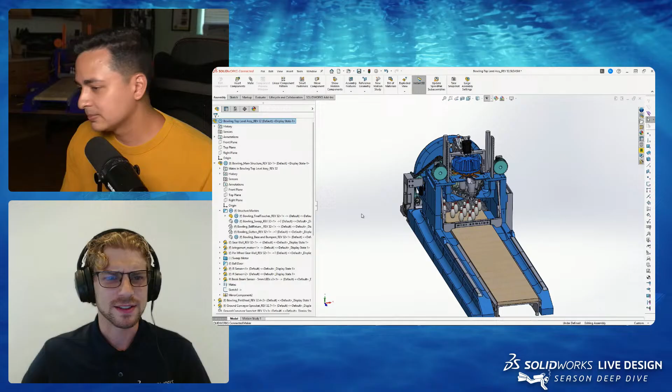How many parts do you have in this contraption? I couldn't even tell you. Hundreds, too many to count. There's a conveyor here, and then these chains that are print in place that have a bunch of different components patterned in a line. That eats up a lot of the amount of bodies.

So you can see the level of detail at this top level. But I just want to show you that if you imagine a layer, like a stack of cake, there's multiple layers to the model. The first time I tried to model this, my feature tree was over 1,000 features, and it just got way too slow and bogged down.

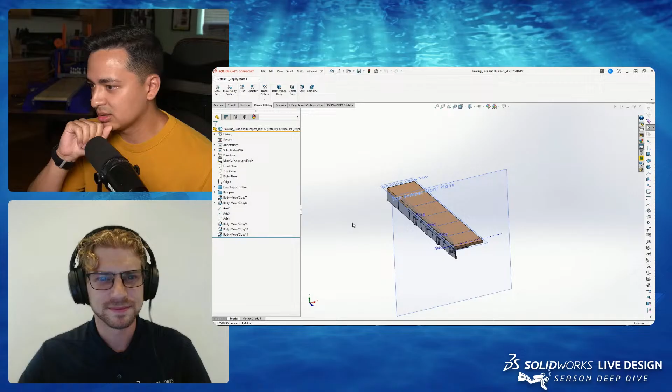One of the things I did to remedy that was try to separate all of the design into different chunks or systems. So this is the base layer where I build the lane, which is just a wood plank that I got from Home Depot, and then plastic. All the gray pieces are the custom parts that will be 3D printed. This is what I call the lane base, which is where I attach the wood to the lane so I can attach other plastic pieces to the entire system, and then it builds on top of that.

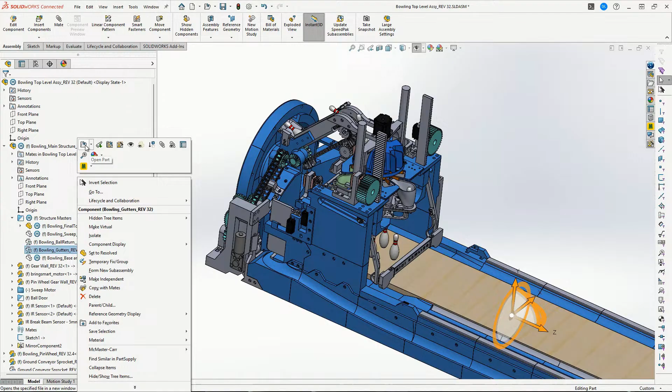The base layer is only a few hundred features, which makes it really, really fast, so I can still model efficiently. Every time I want to go to a next system or add another layer of detail, I'll take that part file and use the insert part command. It loads in the same geometry with all of my reference material that I want to use, but doesn't load in all the feature data that will bog it down. So I can just build on top of it and keep adding detail and maintain speed at different levels, but not slow down my overall model.

So you're referencing geometry from other parts of your model without taking in all the information that is attached to that geometry so you can maintain performance. Is that it? Exactly. Yeah, and you could keep doing this as much as you want.

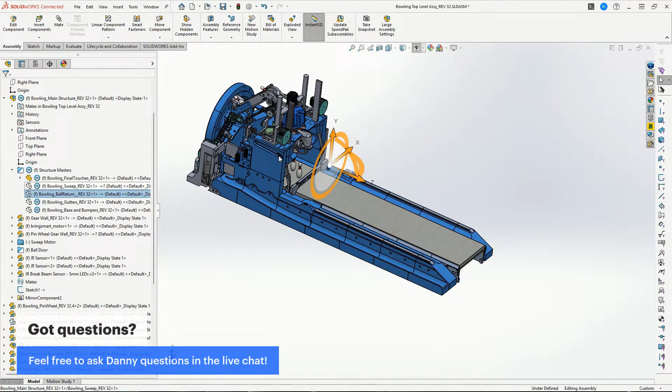To keep it organized, I have this folder of all the times that I did that. So the base and the bumpers is one level. Next layer of cake, I added the gutters, then the ball return, then the sweep, and then I call this final touches, like things that are just too detailed to add at lower levels.

Wow, that's so many more moving parts than I initially thought there would be. It looks like you have chains, gears. Can you take us through those moving mechanisms?

Yeah, sure. So maybe I'll just start by giving a general overview. Sure, yeah.

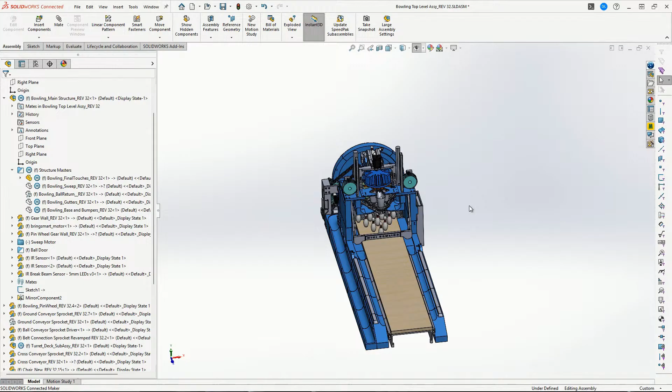Of how the pinsetter works, and how I came up with the scaling for the project. I thought it should fit on a table, kind of like beer pong, but not beer pong—like mini bowling. A kitchen table is like 5 feet long, so I found a wood plank at Home Depot, about 4 feet long, an inch thick, 10 inches wide. That left another foot or so for the pin setter behind it, and I scaled everything based on that.

For the ball, I wanted something that still had the weight you need for a bowling ball to gather momentum, so I found a 2 inch marble. It's got a similar weight factor, and all of that is really important to how the pins fly—they call it pin action. When you bowl, there needs to be a ratio of height between the pin and the ball, and the weight between the two is really important. That's kind of how I came up with the general scale for the project.

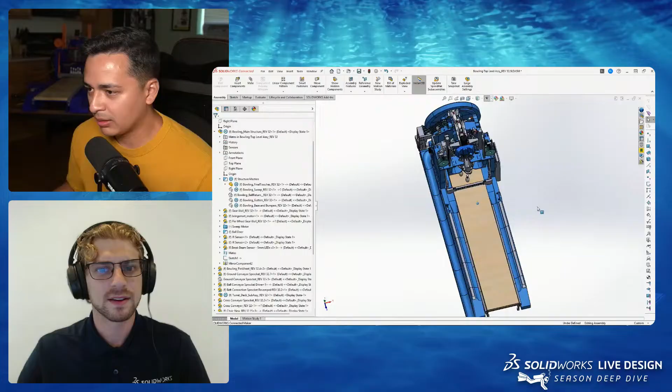Do you have some weight in the pins as well? Yeah, so oftentimes I always start with, what's the worst idea possible? I always think it's a really good idea, and then either I'll realize myself, or I'll post a video about it and be like, yeah, this was really stupid, I got to revise this.

So at first I'll show you the pin model. At first I was like, okay, this is a pretty small printed part, maybe 2 or 3 inches tall. How do I add weight to this? So I was like, oh, tungsten—tungsten is great because it's one of the heaviest elements.

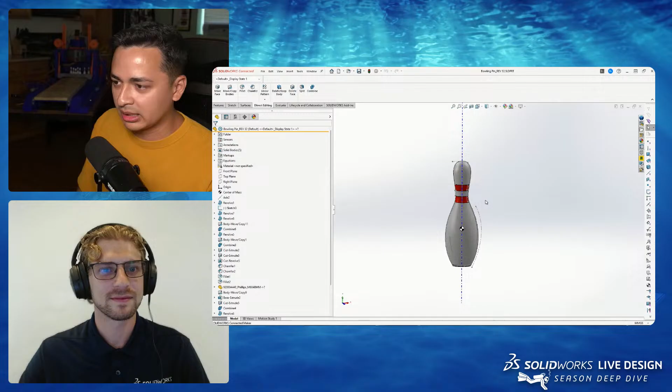So they sell these tungsten gram weights that they use for small model projects. I took one of those, and if you imagine this printing from the bottom to the top, I paused the print and added a tungsten weight in it, and then the print would finish, and I'd have a pin that's the right size and the right weight.

SolidWorks is really cool because if you get really good about adding materials, it'll also tell you the center of gravity and the center of mass, which is super important for bowling pins to behave properly. I got really technical about it—if the weight is a third from the bottom, this is where the CG is. Okay, it's too bottom heavy, now I have to adjust that.

But obviously, if you don't know, tungsten is also really expensive—like 20 of those tiny little weights was probably like 20 or 30 dollars. So I was like, okay, that's a terrible idea. Those are some expensive pins. Yeah, exactly, and I was making mistakes too—I was like, oh crap, now I need more tungsten, I keep running out.

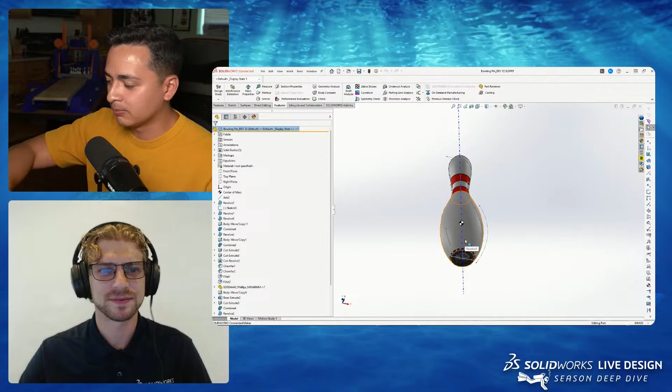And also, as I was making progression in the project, people expressed interest in building their own pin setters. So I was like, okay, now I need to think of a way to do this more systematically, where anyone in the world could recreate this who maybe doesn't have access to small tungsten chunks.

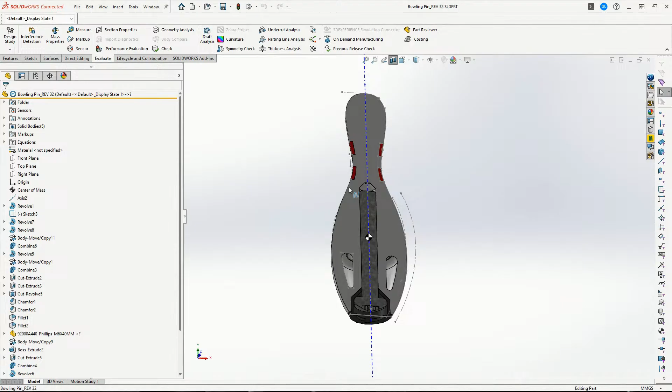So my better solution was, the entire project uses the same M3, M4, and M6 bolt. I basically hogged out the middle and allowed for a cavity for an M6 bolt to be inserted through the bottom to add that weight. I did the same thing where you can adjust the mass properties to get the CG you want—you can see I hogged out some material here to have the pin behave how I want it to. But now I have a cheap way of making pins that anyone can go to the store and get an M6 bolt for.

This is cool too—you could print in multiple different materials. The most common material is PLA, but this bottom portion is TPU, which is a rubber material. So I have this rubber cavity in the bottom to add some gripping for the pin so it doesn't slide, which is also really important. But now it's something that can be easily sourced and made by anyone, and more affordable.

I love that you kept every designer in mind when making this, in case they wanted to replicate it.

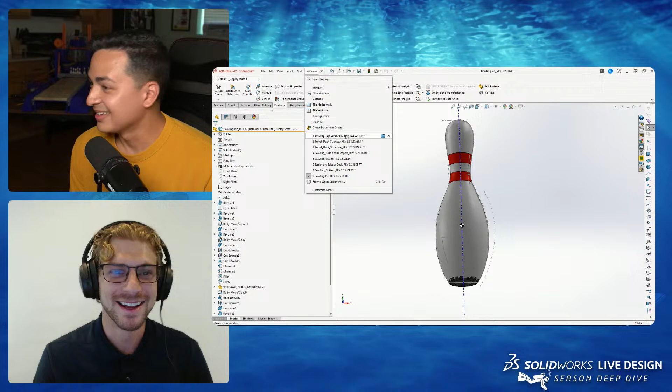I love these episodes because when I saw this bowling alley, I'm looking at all the different moving contraptions. I want to know how that works, all the thinking that went into that. We're just looking at one of the pins, and you can already see the layers of thinking that went into just the smallest detail that you probably wouldn't think at first is super complicated, but it actually is. There's a ton of detail in this, and it's funny you don't realize how much detail there is until you actually dive deep.

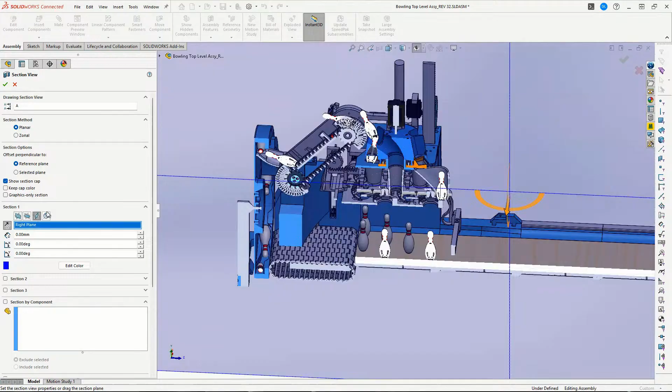Okay, so I didn't even explain how everything works. So you bowl the ball, everyone knows how that works, the pins will fly out. So these are where the pins live, and the area behind it, I believe, is called the pit. So the pins ride back behind here, and I'll take a section view, which basically just means you're cutting it in half. If you cut the whole model in half, this is your view at the side.

So this is a conveyor, and I have a motor attached to the conveyor. So this here, can I take a screenshot and draw?

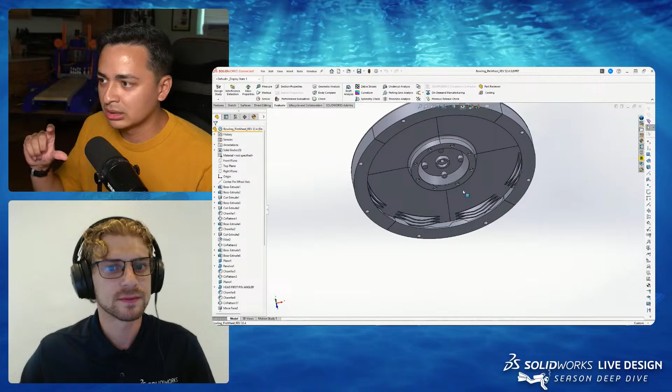Okay, so as you knock pins over, they fall down here, and this conveyor is driving to the left. Then what you have here is the pinwheel, this big wheel in the back. The cool thing about this is that regardless of the orientation that the pin is falling - so like I have a pin right here - you could have a pin that's head forward or bottom forward. Regardless of which orientation it's in, the pinwheel can catch it with these grooves.

So I think I have a better view of it. You can see how these pins can get trapped in those grooves facing a little different directions. One of them is head forward, the other one is bottom up. So as the pins are knocked down, the conveyor pushes them towards the pinwheel. The pinwheel catches them and rotates them upwards to give them height, for them to be cycled to the rest of the pinsetter.

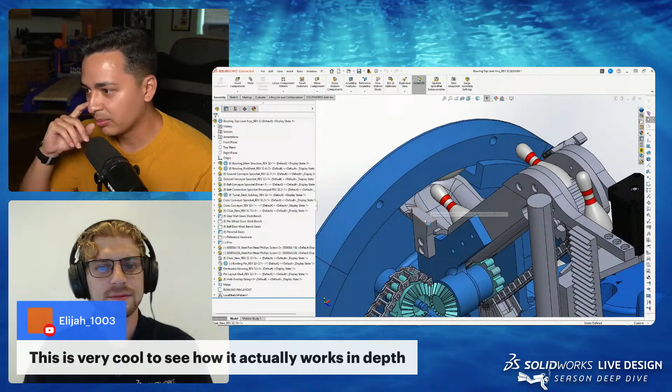And then this is one of the really cool parts, where basically, like I said, pins can load into the pinwheel head first or butt first. But regardless, this is called the turnaround pan, so regardless of the orientation of the pin, it's always going to land butt down. Let me see if I have a good video. Is that because of the weight at the bottom of the pin? Yeah, so the pin itself is bottom heavy, which helps it kind of fall.

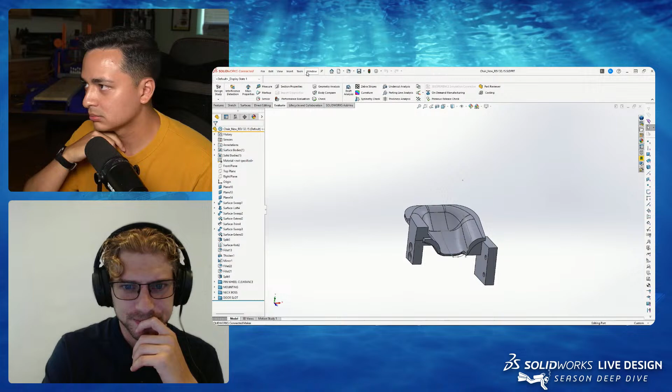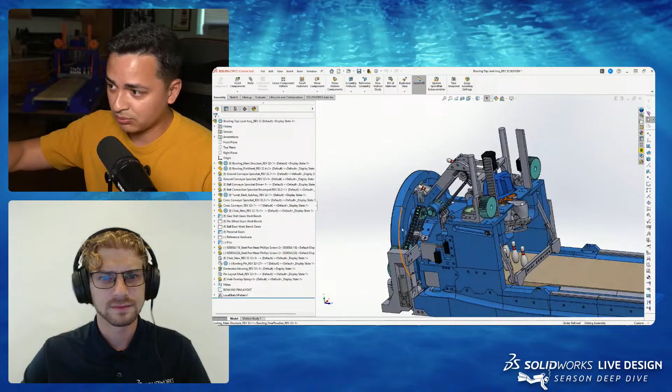And then there's another conveyor, which I call the cross conveyor, which is actually pretty tough to build because it's at a 45-degree angle. How do you catch something that's bottom heavy and give it a decent amount of height? But literally everything in a bowling pin setter is intentional - the pins are bottom heavy, which helps them ride up this conveyor. So we got to the point where you knock pins over, they go through this bottom conveyor, they ride up the pinwheel, now they're traveling this way across and up the conveyor, and then they drop into this thing called the turret. So basically, the turret is catching the pins and rotating them to their correct orientations.

Sorry, I should have loaded up a video about this before, but that's all right.

Just curious, going through this, how accurate is this contraption to a traditional bowling alley? Did you redesign all of this in your own way, the way you thought it would work best, or did you reference older designs?

Some things I took basically 1-to-1, or not 1-to-1 because it's about 20% scale of the model, but basically the same design recreated at scale. And some things I looked at and thought, this doesn't really make sense, let me create it in my own way so it'll be easier to build for other people.

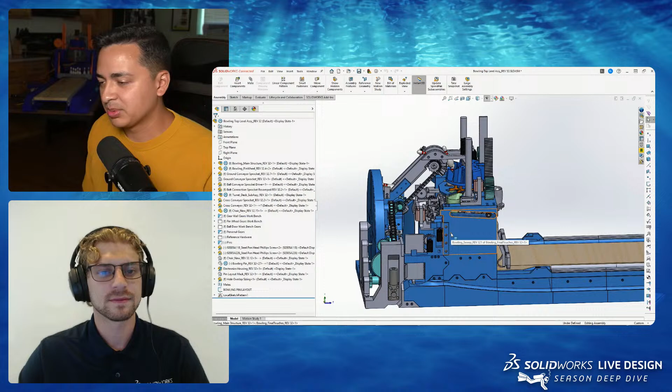So for instance, one of the reasons why a pin setter could be included in a mechanical museum is because most pin setters use only one motor to power all of these different contraptions going on. Most pin setters have a ton of gear ratios and different mechanisms so that one motor can take care of all the action I'm describing.

I decided I'm going to make this easier by using more motors and separating some of the motion, just to make it easier for myself. And it was still a really complicated project.

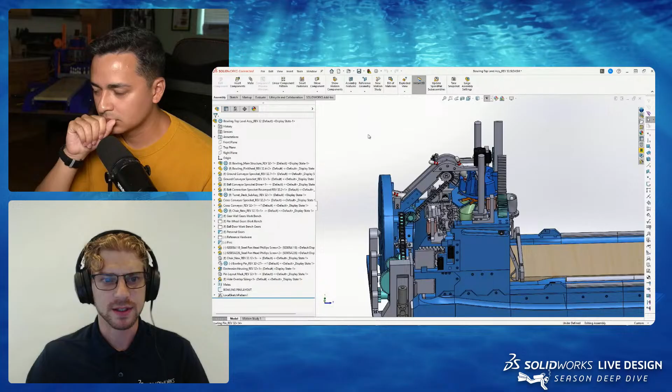So you use multiple motors for the different moving parts of this assembly? Yeah, correct. How many would you say you use in total? I think like 7.

There's one for this one here that you see controls it. I did some gear ratios to try and limit how much extra electronics would be needed. So this one motor controls that conveyor at the bottom that is pushing the pins to the left.

And then this gear train, which I'll go over in a bit, also controls the pinwheel, which is what's going on in the back here. And through this linkage chain, it's also the cross conveyor.

So out of one motor, you get 3 things going on. You get this bottom conveyor pushing to the left, you get this pinwheel turning and pulling pins to the top, and then you get pins going across this bridge to this circular, crazy looking thing called the turret.

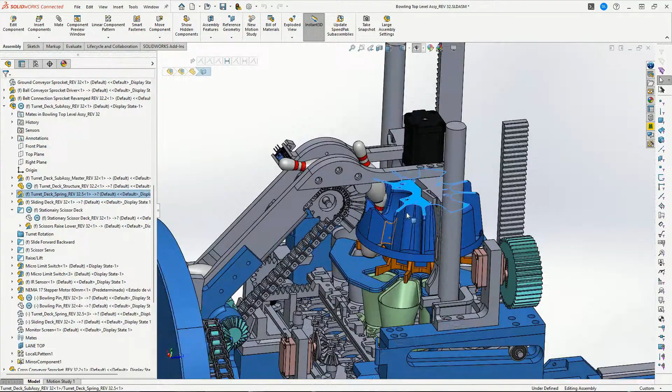So while you did use multiple motors compared to a more traditional design, you still made those motors efficiently contribute to multiple moving mechanisms. Yeah, as much as I could.

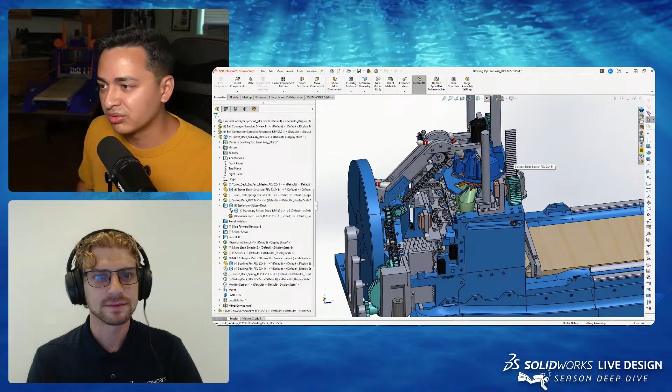Here it made sense for me to try and limit the amount of motors because I could, but it was also kind of a space constraint thing. Obviously a real pin setter is much larger — I can't do what I did here with complex gear ratios to control everything just because of the size, it wouldn't fit. But where I could, I tried to limit the amount of motors that I used.

This is so satisfying to watch, those pins being loaded into the turret. It's filled with a bunch of really satisfying contraptions.

So then you have the problem of: okay, the turret has 10 pins in a circle, but obviously the pins are oriented in a triangle. How do you transition them from a circle to a triangle?

So the way that it works is—this is one of the things I'm most proud of, I think this is so cool—the turret I made in 3 pieces.

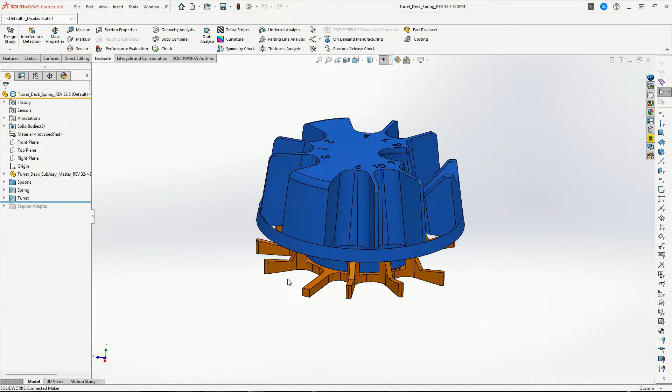So this bottom part is what I'm calling the spoons. The spoons are attached to the blue piece via a plastic torsion spring that I printed. Here, I'll just hide this.

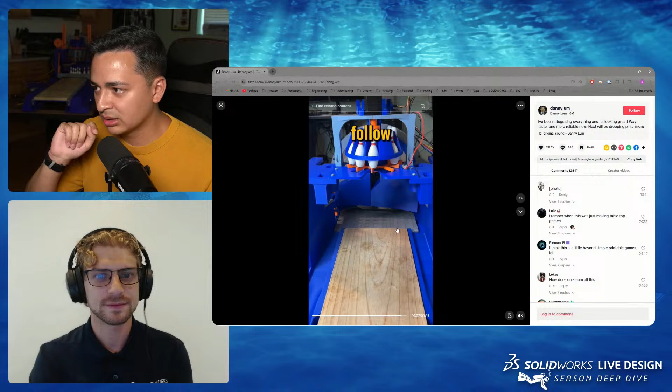So basically, you can imagine that the spoons can slide out of the way as these pins are being caught. Once I have 10, let's see if I show it in this video—the pins can slide out of the way. Did you see that? Yeah, I see.

So they're released all at the same time, and then after they're released, they go into what's called the deck, which is like these cone pieces, which I did a really cool thing in SolidWorks for. I'll show you. That's the part that makes them stand up in that triangle orientation, right?

Exactly, yeah. Basically these cone shapes - they're almost like funnels, like funnels that bring it from a circle to a triangle. So I made these, and they're all lofts.

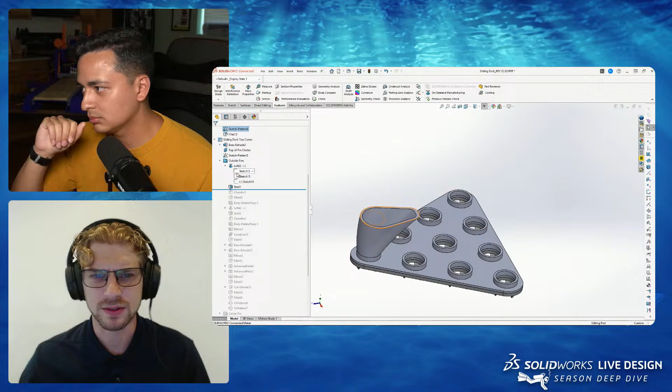I was going to ask, did you use surfacing for this or stick to more traditional lofting and extruding? This is just like traditional lofting. I try it - I've done some surfacing like this.

I call it the chair. This is surfacing because it's got like a weird bathtub shape. If I can model it using solid modeling, I'll do that, just because surfacing is so finicky - if you tweak one thing, it might break. You don't have a ton of control over it. Right, but what's it called?

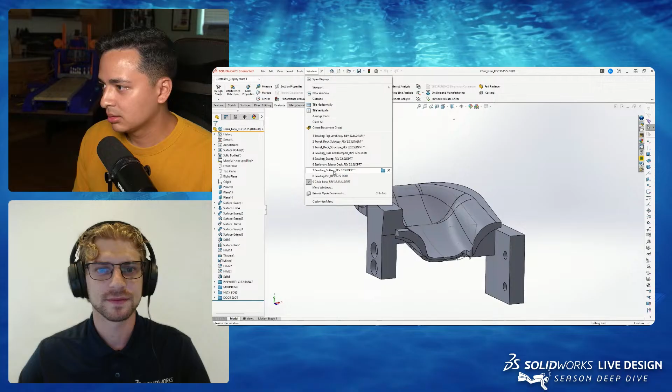Yeah, I'm the same way. I lean more towards solid body modeling. I will break out the surfacing if I have to, but if I could get it done with some traditional extrudes, that's where I feel at home. Yeah, I don't know, the simpler the better sometimes.

So you can see I have this sketch - here, I'll turn off planes so you can see it. I have this sketch which catches it at the top where it becomes a circle, and then I have the circle in the triangle formation, which is where I know it needs to be. The loft does all the heavy lifting to transition the shape.

And then I use the shell feature to hog out the material. My general rule for 3D printed parts is 3 millimeters of wall thickness is kind of like the minimum, or maybe 2.5, just to keep things lightweight.

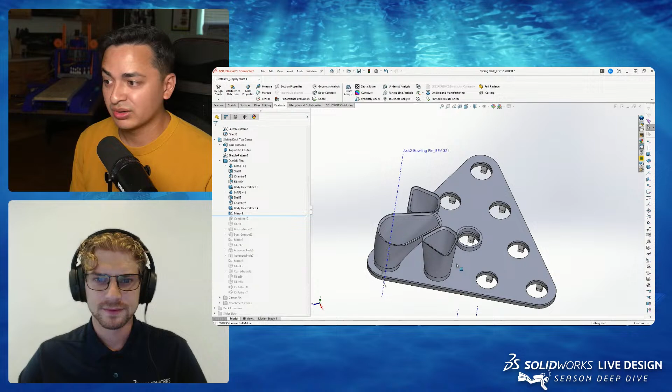I'll touch more on this in a bit, but this is another loft. I always want to do as little work as possible, so instead of modeling 10 different cones for all the different pins I have, I recognize there's symmetry and I could use mirroring to make my life easier. So I made this part, and then these are all just patterned around to get the other three.

I see, yeah, that probably saves you a ton of work, a ton of features too. Yeah, probably saves on your performance.

We got a cool question in the chat: have you noticed the same issues with this as you would see in a normal bowling alley? That's a good question - I think I definitely have. It's funny because as I started making these videos, people were like 'whoa that's so cool, I want to build my own,' and I also got - I have a Discord community where people just join, free to join, come talk and say hi. I probably have like 20 different bowling mechanics who work at bowling alleys and use these machines daily join.

They've just been giving me feedback and help with the project. A lot of the times I'll bump into a problem and they'll say, 'oh that's so weird because that's exactly the same problem we have in real life.' And the only solution is just, 'oh yeah, sometimes a pin gets stuck here and the technician just has to go in the back and release it, it just happens.' It's pretty funny - I bump into a lot of the same problems, and the technicians always tell me it's pretty realistic to real life.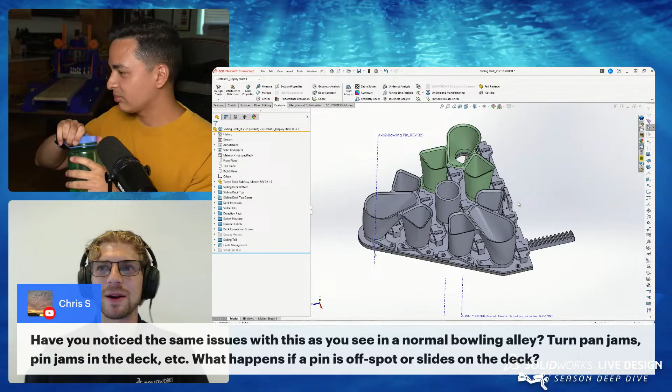That's awesome. I wonder if not only were you able to learn from them about how they solve those problems in real life, since they sound like actual experts who maintain these machines in bowling alleys, but I wonder if you were able to help them too, since you have a tool here - 3D printing - that they don't typically use in a traditional bowling alley.

Geometry to solve any problem virtually. Genuinely, I have no idea. Like they made this decades ago, and it's mechanically perfect to solve all these problems. How do you do that without 3D printing? Do you just keep modifying a piece of metal until it gets to where you need to be, and then probably you made too many changes, now you have to throw it out and start over. I have no idea how that works. Shout out to the traditional engineers, the old school engineers. Those guys were smart.

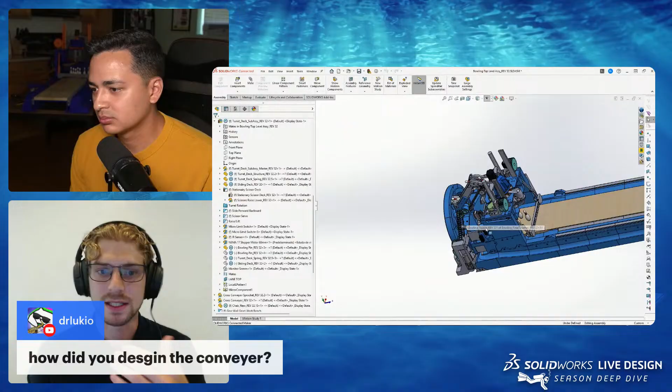We got another cool question in the chat. How did you design the conveyor? I'm curious because you used mirror tools to save time on making multiple features. Did you use that for the conveyor as well? Because it looks like that's a lot of repetitive parts.

Yeah, I'll talk about it quick. This is another thing I haven't talked about in a video yet, so you guys get some exclusive content for the SolidWorks channel. This is just a tread that's patterned a bunch of times. So this is a good example of teaching yourself and learning on your own.

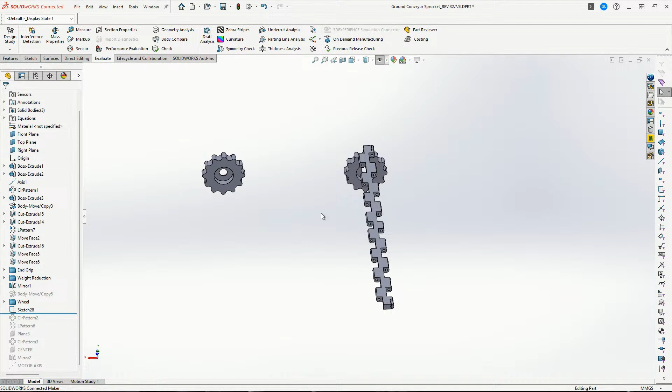I didn't know how to make this thing called a gear and sprocket and chain, where you have this thing that looks like a gear, but actually it's a sprocket.

Let me take a section view here. You can see that the teeth, or the bump outs, the round features on the sprocket or gear, mesh perfectly with the treads on the conveyor.

So this is something I didn't know how to do. It took some prototyping, but I taught myself how to do it originally from a YouTube video that just showed how you design a sprocket and chain. I was like, huh, that's really cool. Then it took me a few tries, but eventually I got it, because you have to make sure all of your patterning is exact in order for things to mesh properly.

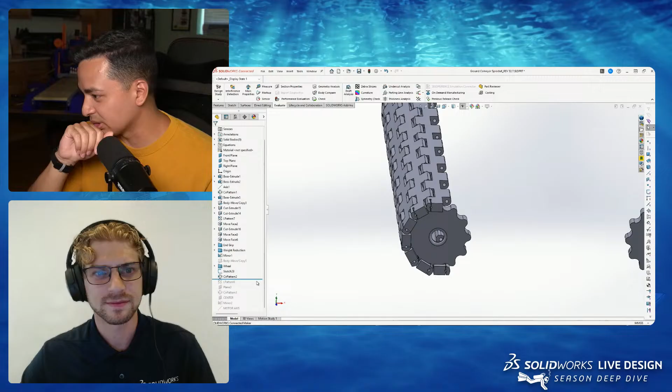And then the thing I think is really cool is, similar to the use of the tungsten to weigh down the pins, these are really wide treads. They're slightly wider than the bowling lane, which is 10 inches, because it's got to catch pins and the ball on both sides of the lane.

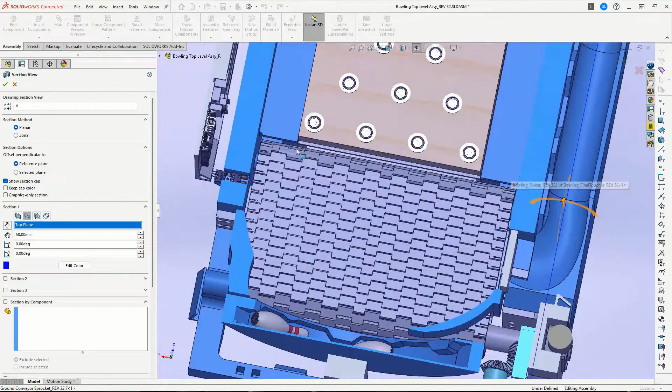So what I mean by that is the treads are wider. Here, I'll take a top down view. You can see that the treads here are wider than the lane itself. It's got to be like the lane plus the gutters on both sides.

So they're really long pieces and almost don't fit on my printer. But you also have to connect them through these little holes where they interweave through each other. How I did that originally was I was using these small metal toy axles, but they weren't that long, so I'd need like 3 of them per connection. I was like, this is really bad, and once again this is going to be a part that maybe not everyone can source.

So what I did was I saw a video. Basically everything in engineering has been done already, and I'm just leveraging everyone else's ideas to get what I want. That's picking and choosing what could help, that's what engineering is. I stole someone else's idea where you use a piece of filament as an axle for a chain.

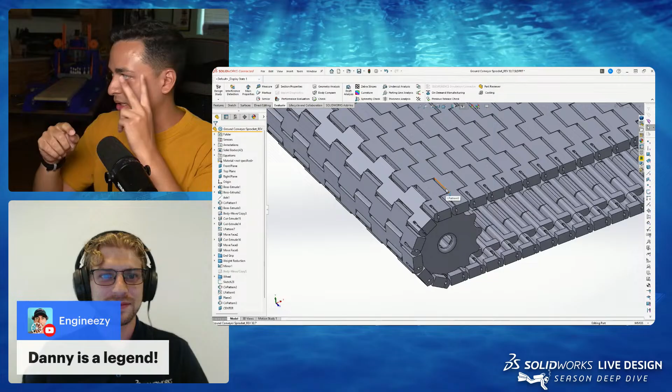So all of these treads are connected with a piece of filament that you just put through, and you connect two pieces together, and then you snip the ends, and that's your axle, and this whole thing can move together.

And then I was having an issue where the filament would start sliding out, because this thing is moving really really fast, it's vibrating, so then the tread starts sliding out. So a cool thing that I did, let's see if I could draw it for you guys, was I made like a little 3D printed piece.

It's like a little spring finger, alligator clip type design. You can put the filament in, and because this piece of plastic can bend as you put the filament in, it will splay outward a little bit, but it'll have enough spring force where it's still applying a little bit of pressure on the filament. So it's spreading apart enough to put the filament in, but also putting enough pressure on the filament so it doesn't slide out as the whole thing is rotating.

I love that. That's such an efficient use of 3D printing material. Not even 3D printing with it, just actually using the material to help with your design. Yeah, I was really proud of that. That's awesome, that was a cool thing.

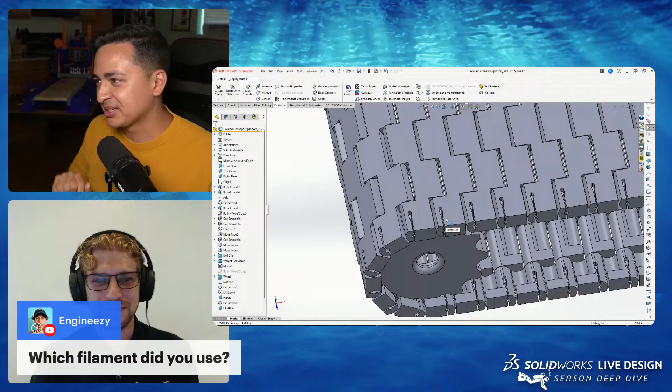We got a question in the chat from a fellow designer who's been on the channel, Jay from Engineezy. He asked what filament did you use? I use mostly PLA, but for the axle part I use PETG because it's a little stronger.

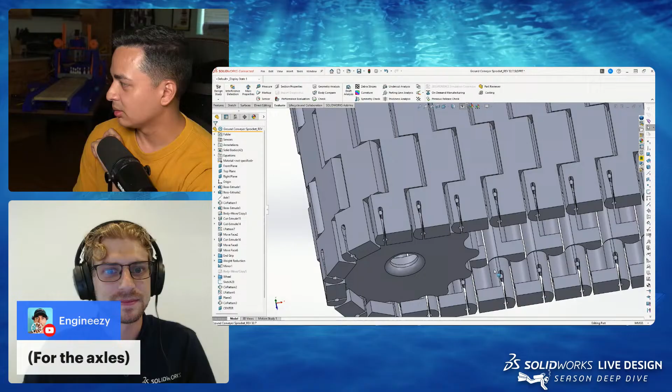That makes sense, and it just makes so much sense to see this in the prints. I've used that trick before, using the filament as an axle, but it does tend to fall out, so I've ended up burning it with a lighter and clamping it to change the shape. But this makes a lot more sense. So you're 3D printing almost a mechanism that locks the filament so you don't have to actually deform it with anything else. Exactly. The burning works too, but the only thing that sucks is if you want to take the thing apart, you basically have to break it—you have to break the part that you burned to take it apart. This lets you keep everything the same basically.

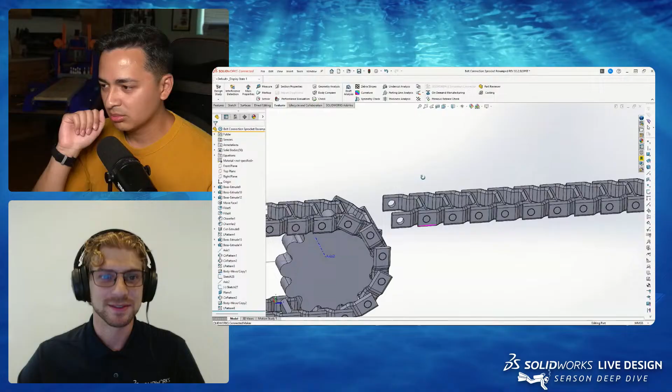Another cool thing about treads, or gear and sprocket, is that since these aren't as wide, this chain doesn't need an axle. So this piece, you could print the entire thing in place, which is really cool. If I show all bodies, this is how it looks in the model, but then I made a separate pattern, so over here is what I would send to my slicer to print. This is the first model I did that was print in place, which is a weird concept because you're like, how can something that moves be printed in place? Wouldn't all the plastic bind together as you're printing it? It's a weird concept, but basically how it works is there's a tiny air gap—you leave a small amount of room between the two moving parts, like 0.2 millimeters.

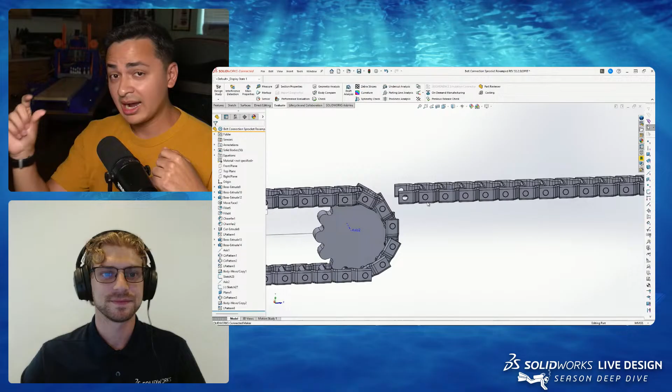And that's kind of how support works. If you've ever 3D printed and used support for overhangs, like if you print a roof shape or a T shape, you need support material, but the support material has to be removable. So there's a small gap between the support material and your actual part so it can print okay, but still be like the part that you want. You leave a small air gap so you can still separate them after they print, which is pretty awesome.

It's almost like you're printing in midair for a minute, defying gravity for a second. I love how you laid these links out so you don't have to physically assemble each one—that's going to make it a lot easier if other people want to make this.

It looks like we have someone in the chat who wants to make this themselves. Chris asked another question: 'When will you have the files out there? When will it be complete? When will you have a full BOM with motors and other parts needed? I really look forward to building this.'

Thanks, Chris, for your question. Yeah, I am very excited. I keep saying a date and then I bump into more problems.

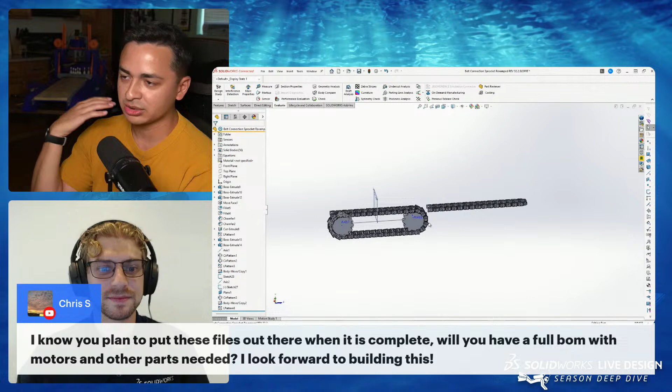I can't give you a specific date, unfortunately, but I'll say that I'm very close. I just figured out the scoring. Pretty soon it's basically just going to be integrating, putting it all together and making sure everything works well with the software. Then I have to make the instructions video and a final YouTube video to fully summarize the project, but we're getting very close.

Got it. Yeah, just seeing the detail that goes into the pin alone, I don't doubt it's a whole process to document this after you're done designing to share with your community.

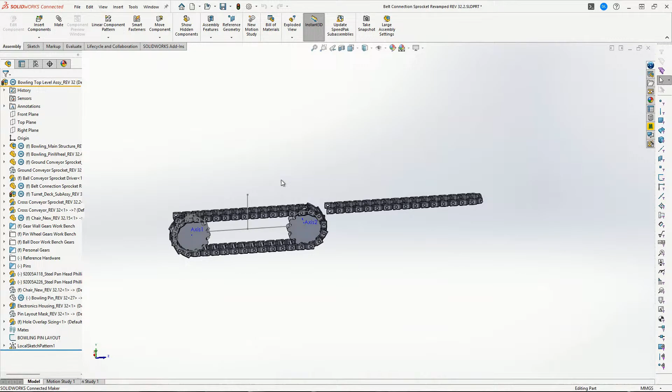Yeah, I want to hide this now. See, this is why I had it hidden, because it would make my model look ugly. But that actually ties in perfectly, because it looks like you designed it to physically see where it would go, but maybe not how it would move. Exactly, yeah. So now I'll just hide these. This is just for the model to print.

Okay, and then we got Elijah in the chat asking, how do you think through the mechanical movements of some of these parts when designing them? That's a really great question.

It's tough because, like I said, when I started I had no idea how bowling pin setters work. So all I have is my community, people really involved with bowling machines who know exactly how they work. I'll go on my Discord and have this whole PowerPoint of images I'm drawing, asking 'is this how it works?' and they'll give me feedback. It's kind of an iterative process.

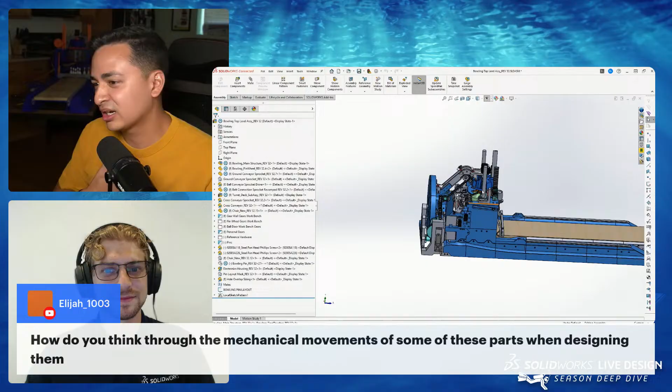Then I have to print things out and test it to make sure it works how I think it's going to in real life. That's part of the reason this has taken so much time on top of working full time - this is still a hobby for me. It's a really involved process. A lot of the time I don't really know what I'm doing, I'm just trying things out and seeing what sticks and what works well. It's a learn-as-you-go type of thing.

I love it, this is the side hobby of all side hobbies. Yeah, hopefully one day, but for now it's just a hobby.

In that same vein, did you use any additional software products or anything else to simulate the movement of some of these mechanical components? That's a really good question.

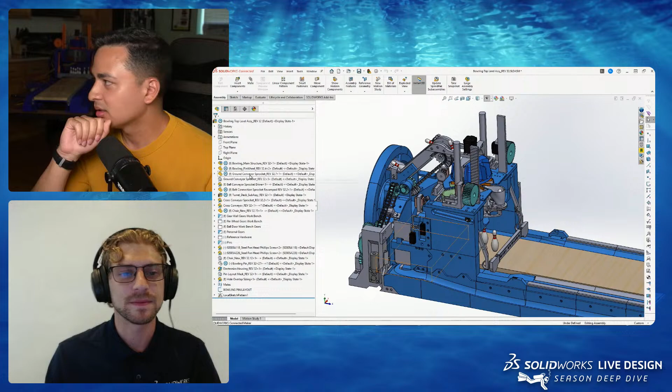So I didn't even get to the point where I fully explained how the pin setter works. Very quickly - after the turret, the pins drop into the cones. Then the cones drop down to here where they sit on these little ledges. Then this entire platform can lower and raise, and once it does, it can drop pins down onto the ground. But that's just for setting pins in between frames.

So once you bowl your first throw, is what I call it - I don't know if that's the technical term - in between throw one and number two, you have to pick up the pins and pull them up, then the sweep comes through and clears all the knocked over pins and puts them back down. So there's a lot of things going on in the system.

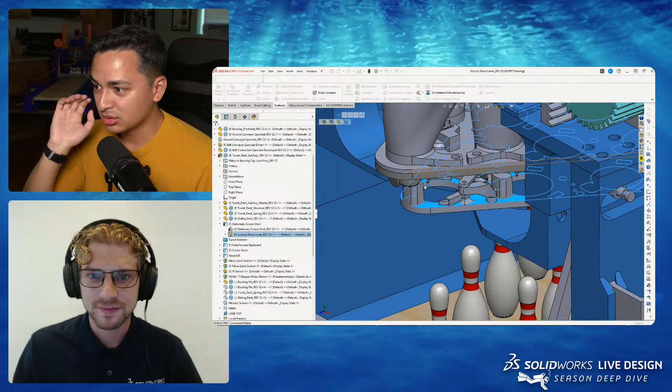So I'll talk about the part that picks them up and puts them down, which is called the scissors - this part, which was so time consuming. I wanted to try and make this print in place, but everything is so small and precise, it really couldn't be. So all these little scissor hands, these linkages, are all separate parts.

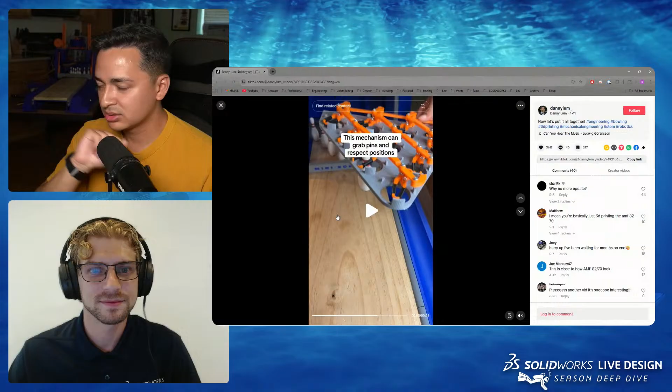But they're patterned 10 times around this triangular path with circle holes. What's really interesting about this is it's a mechanism with 2 degrees of freedom, so I'll show you what that means. Here's a little video I made - as the pins are in their circles, notice how when the pins are picked up, it's not recentering them.

What I mean by that is if a pin is on the outside edge, it's not pushing the pin to the center of the circle that it's sitting within. It's respecting its position. The way that works is there's 2 degrees of freedom, which is pretty complicated.

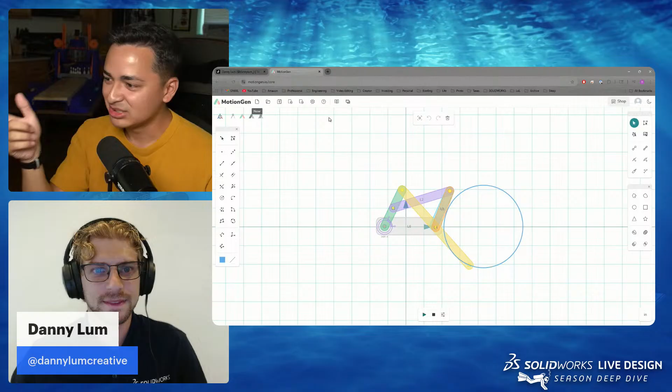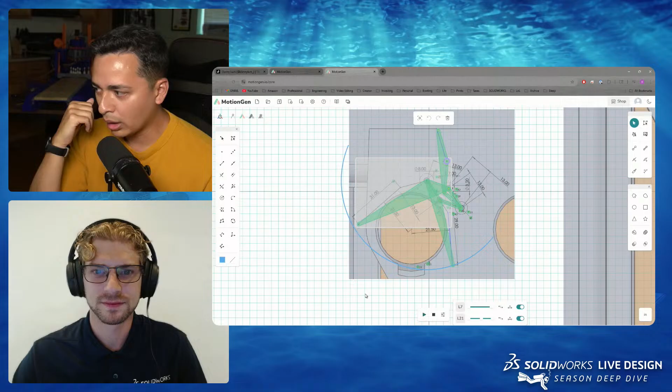I did this with the scissor mechanism to very quickly determine the right lengths of the linkages. So you can see here, this is just one tenth of the entire mechanism. But if I press play, I can drag and see where the mechanism will close and open.

This is tricky because only one of the scissor hands is fixed right now. So what you're seeing is 1 degree of freedom because I have this hand fixed. If I free that one and then fix this one, it didn't work. All right, this thing's broken. But anyway...

What's supposed to happen is both of the hands can move independently, so that once one gets stuck up against a pin, the other one will engage and meet it where it is instead of pushing it over. If that makes any sense.

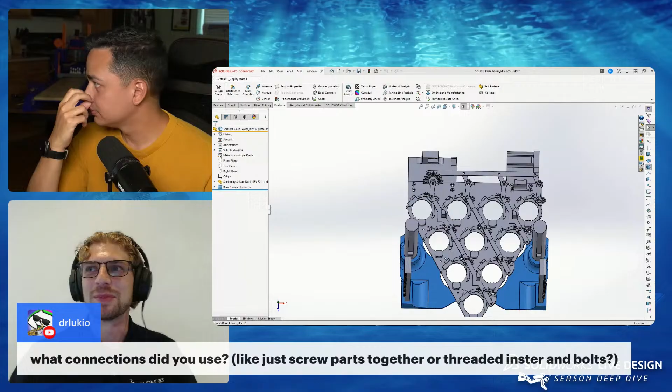No, it does. So you're not trying to give the bowler any additional benefits. If they move the pin a little bit, it's gonna stay that little bit over. Exactly. Like if you bowl a pin and it goes flying and it's in an extreme position, not where it's supposed to be, it's supposed to live there and on your second frame be exactly where it was in the first frame. Who knows if you can even tell at this scale, but that was a tiny small detail that I really wanted to get right.

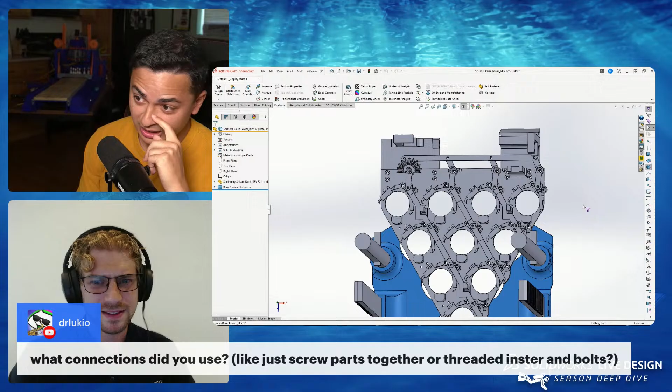Is that on actual bowling alleys? Yeah, that's how actual bowling alleys work. Wow, so truly accurate to the real life mechanism. Definitely accurate. That's amazing, and a perfect example of something I would never know just looking at this, the type of thinking that went into placing that. Yeah, this part was so complicated, but once I got it, I was like, oh man, that feels so good. That's so satisfying.

Nice, we got another question. What connections did you use, like screw parts together or threaded inserts and bolts?

Ideally, if you can in your 3D printed projects, it's best to use threaded inserts because, if you don't know, a threaded insert you put into the plastic part, and now you have metal threads in your plastic part that won't wear away that you could put a fastener through. But because this project is so big and there's hundreds of fasteners, I wasn't going to sit there all day, especially after each of these parts I probably printed like 5 to 10 times by now, just iterating through prototypes. I wasn't going to sit there and put like 300 threaded inserts into this project.

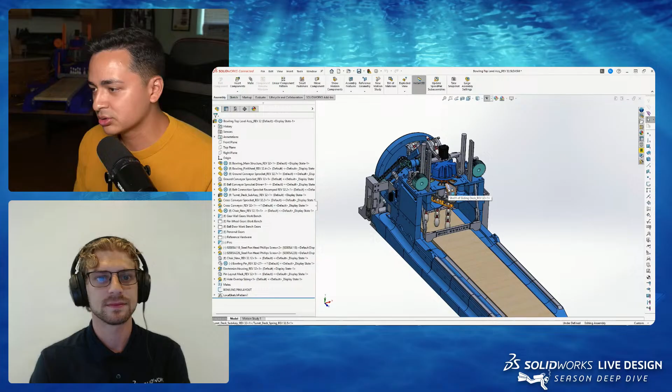Makes sense. And actually, I want to show you another thing that's really cool, talking about making connections between 3D printed parts. So all these holes that you see, in previous versions of my project I was like, okay, how do I make a hole? I could use the hole wizard, which is pretty helpful, or I could just physically design in a sketch like a circle and extrude cut it. But then you don't get some of the level of detail that I want in the project. Okay, hold on, I'll show you a better example.

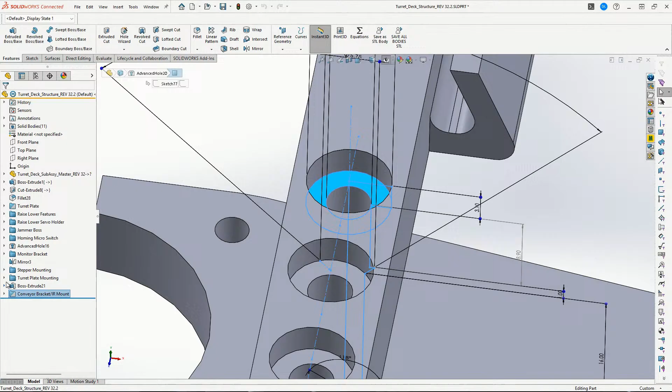So for instance, this hole is like a counterbore hole, so it has a little seat for your screw to sit in. But the way that I make this feature is with an advanced hole, which I really like in SolidWorks.

Let me open this up. This is a good way to minimize how many features you're using because it combines a bunch of different features in one. Not only is it making a counterbore through the first part, this one you saw like 4 features in there, right?

So this part has to connect to this part. This part has a counterbore and then a clearance hole so your fastener can fit through. Then on this side, there's a lead-in chamfer so that when you connect the two parts, the screw can easily find the second part so it doesn't wobble around and you can't find the hole as you're threading it in. Then this hole is the tapped hole, the smaller hole that as you're threading the screw down will form threads in the part. So you get 4 different features all in one feature, which is really nice.

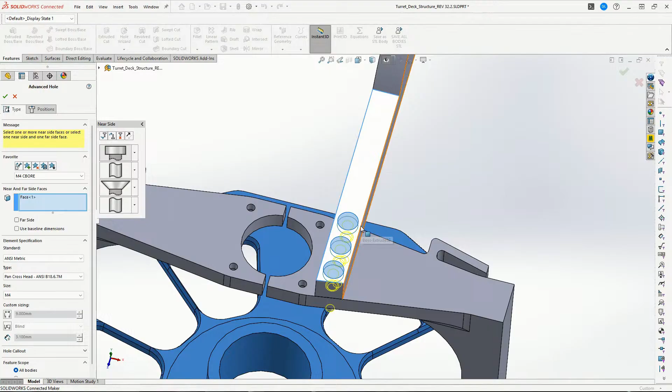Talking about robust modeling and keeping your model efficient, this really cuts down on your total amount of features used.

I love that. That's such a perfect pro tip because you're basically combining like two extrudes, a chamfer, a couple sketches. So that's a really good use case for that.

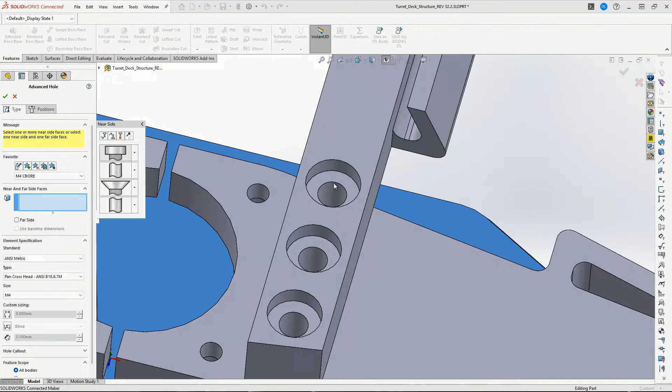Another thing that I like is, because this whole project I tried to be consistent and not use a ton of different hardware, I used 3 different types of screws in the entire project. So I've just loaded those profiles in. All I have to do is make a sketch for where the holes are going to live, then I click like an M4 counterbore, and then I just click that point and it makes exactly what I want in a second, which I really like. Nice.

Okay, looks like we'll continue on. We want to get to where the pins are finally hitting the runway - what is it called? The lane. I'm not a bowler so I don't know the term. Oh, the lane, that would make sense. But yeah, I explained the respotting with the scissors where you pick them back up and put them down. And then these, what's it called?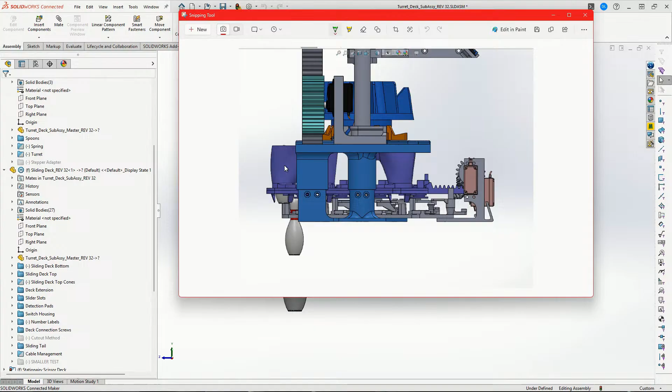So this entire purple piece slides backwards and forwards. This purple piece lives where you see it right now by default, but it can slide to the right. So basically what that does is, if I take a section view, it can store a pin in this cone and also at the same time have room to respot pins. So this entire system could hold 20 pins at once, because if there's 10 pins in the cones and 10 pins being picked up by the scissors, it can do that at the same time. But once it's time to put the pins actually on the lane, the purple part can slide back and forth and release them from these pegs and put it onto the lane.

I see. I can show you quick if I have a quick video.

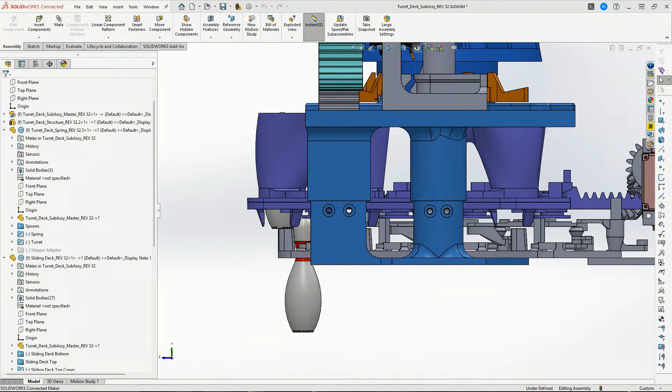And while you're trying to find that video, we got a good question. When you're assembling these parts, is the plastic damaged after you screw it in, or can you reuse that part after you actually connect it?

So you have to be careful. Short answer is that's the benefit of using a threaded insert - you can get probably hundreds or maybe infinite usage out of a threaded insert because it's a metal part. Plastic parts, yeah, the threads are going to deform, but if you just thread it in carefully and don't use a drill at max torque, it'll be fine. Just thread it in, when you feel it bottom out, don't push any further because then you're going to strip the threads. But yeah, just thread it in carefully. I mean, I've been doing that for the past few years for all my projects, and rarely am I throwing out a part because it's fully stripped.

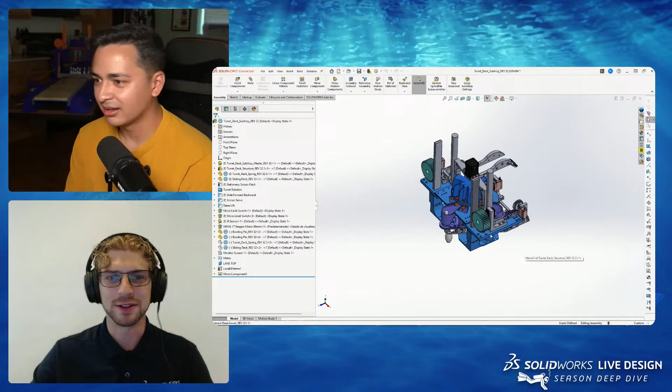Definitely, hand tighten with caution when you're using 3D printed parts, I say. Exactly, yeah. So that's how the pins release. There's one other modeling tip that I wanted to talk about - there's a bunch of different ways, or flavors, that people model.

As you can see, this purple piece is a separate assembly from this gray piece, but they're working together and referencing each other, using a lot of the same geometry.

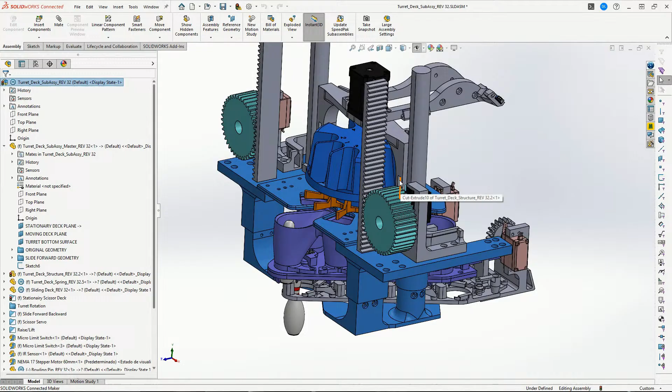One of the things I did was avoid using a ton of features in the same part. Like I said before, which was a problem for me, I made a master file. So basically, I make one file that has all the reference geometry I want. It's a little different than what I did before, where I was taking like 200 features at once, making that one part, inserting it into something else, then building on top of it. This way, you build all your reference geometry in one part file that all your different parts talk to. So if I want to make changes, I only have to change this one and it updates everything else.

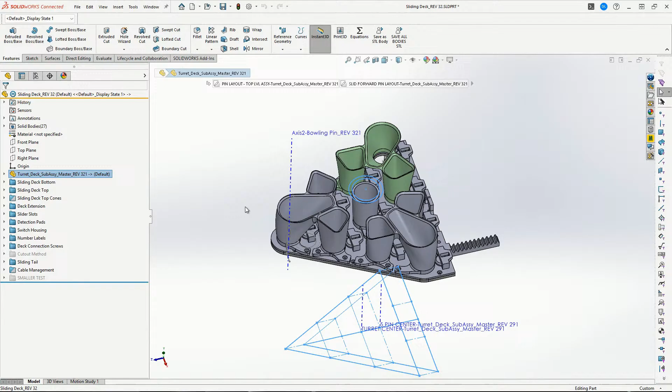So now this lives here. You saw all those planes and where all the pins are living. Then in this part file, I insert that master. So at the top of the tree, all of my parts that need to reference this geometry are all talking to the same part. If I want to change one thing, it changes everywhere, and that limits your inconsistencies and errors in your modeling.

I love that way of modeling. And it doesn't even look like a crazy amount of references - it looks like a couple sketches.

Yeah, it's not that complicated. Basically, because the purple is sliding, it's like the same - what's it called - the same 10 circles in a triangle, but they're offset about 30 millimeters from each other. So it's the same shape, just pushed forward a little bit.

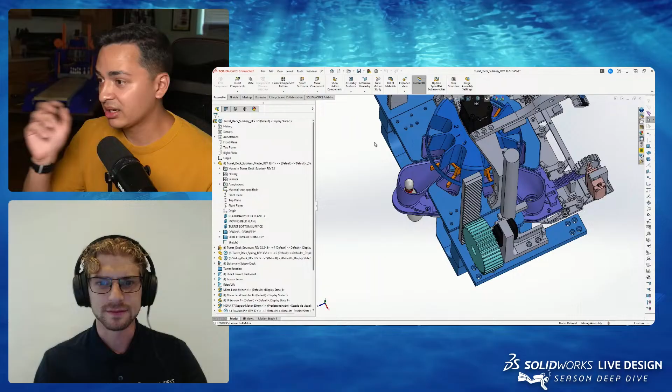And actually that distance changed because I realized something - oftentimes you don't realize things until you build it and it doesn't work. I had to change that distance, which was really nice. I was like, I probably have to spend all day fixing this model, but actually because I set it up this way, I changed 20 millimeters to 30 millimeters and everything updates with minimal errors, saving you a lot of time.

That's a great tip, especially when you're working with this many parts and this many references. It would be a nightmare to change something and then have to painstakingly change it in every other part. But this way, they're all referenced in one.

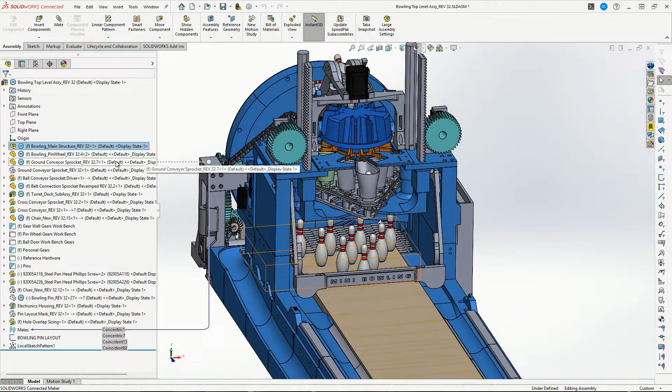What did you name that master reference? Just something with 'master,' so I knew it was the control file. And then another thing I really like - you'll see all these different names. I try to give something a name, and then I have 'Rev,' just like revision with a number. This is all the way up to 32. Honestly, I've made like 32.1 - I probably made a hundred different versions of this file.

But I really like pack and go in SolidWorks. So... where is it? Pack and go.

Say you want to make a big systematic change to your model, where if you change something it's a really big change - you like how things are, but you think, what if I change this one thing, that might actually be better. But if I build it wrong, that might break everything. So really I want a whole separate package of files just to sandbox and try working in without breaking my existing working model. That's what I use this for.

Because everything has Rev 32 at the end, I'll do 'replace text with,' and do like, oh, Rev 32, I'll replace that with Rev 33. Now all these files update from Rev 32 to Rev 33 in the file name.

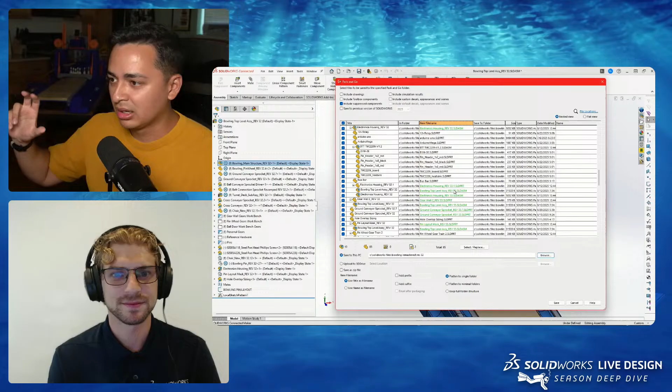And then I'll just make a new folder, Rev 33, and now all these files get placed here. They keep their relationships to each other and don't break anything. It's a whole separate set of files that you can work in without changing or breaking your existing set of files that are already working well.

That's a great pro tip. Masterclass today, and not just design, but also file organization and data management for sure. It's important to stay on top of it, especially as you're prototyping and making so many different iterations of all these different parts. You can get lost easy, so you have to stay organized.

Speaking of the crazy number of parts, we got a comment earlier from one of our SolidWorks experts, Eric, and he highlighted something because I'm curious - maybe some people in the chat are curious how many parts are in this model. I know you were so bogged down with designing it that you hadn't found out, but he says you can go to Tools, Evaluate, Performance Evaluation, and scroll to the statistics section. Statistics, parts, number of bodies: 1553. Wow, there you have it, folks.

But like I showed you prior, not all of those are unique parts. Even in the chain, I patterned more bodies just to make printing easier. Not all of those are actual bodies that are in the Pinsetter - some are references.

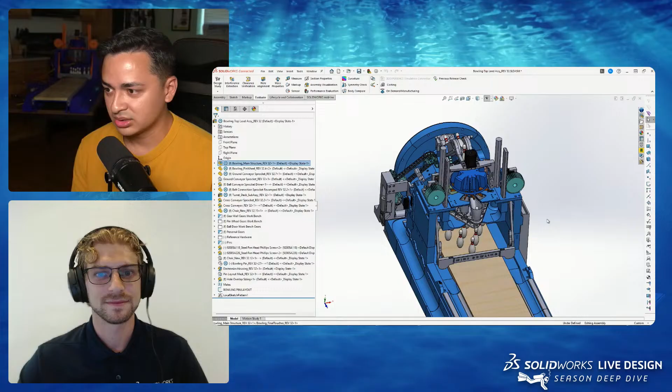My message would be, if you want to learn SolidWorks, YouTube tutorials are great, classes at school are great, but the most I've ever learned is from just getting my hands dirty, making something. Sometimes you have to print something and test it in real life to see how it's gonna behave. If you want to build something and learn, just start building. That's the best way to learn, especially with engineering and passion projects. A lot of this knowledge I have - I have a whole list of things to talk about I didn't even get through - but a lot of the things I'm talking about, I've just learned through trial and error, teaching myself through these really detailed projects that I enjoy, and hopefully other people enjoy watching my struggles as I build these projects.

No, I think it's a great thing to highlight too. What I love about your videos is you don't just show all the great things that worked, but you show some of the areas where you had to learn along the way, some things that didn't work the first time around.